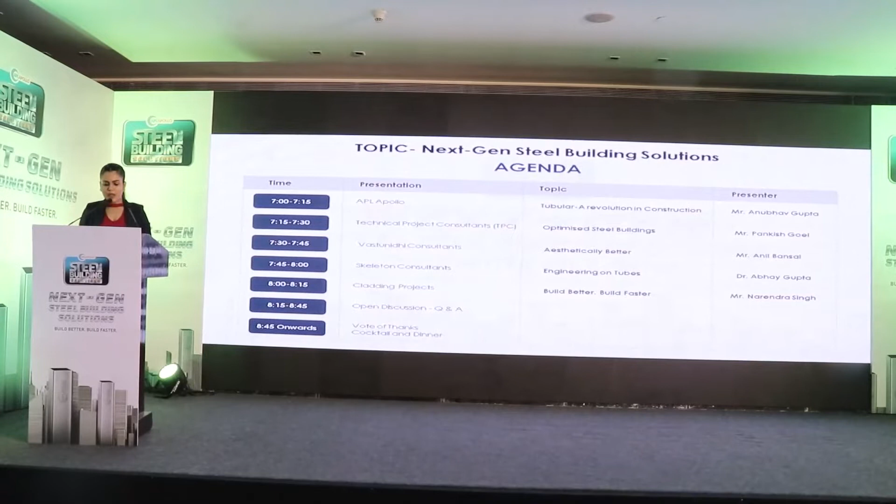So ladies and gentlemen, without any further ado, I would like to invite on stage the Group Chief Strategy Officer from APL Apollo, who focuses on strengthening the strategic capabilities while also identifying and evaluating innovative opportunities for APL Apollo in the longer run. He also advises on corporate development, communications and marketing of the APL Apollo brand, aimed at creating a strong positioning of the company within the domestic and global markets.

He has over 14 years of experience in industry research and business strategy. Please put your hands together and join me in welcoming Mr. Anubhav Gupta. Good evening, everyone.

It's a real pleasure to have you here. It's a lovely evening, and we thought to gather every one of you so that we can talk about a Nai Soch in the construction industry. We being the largest structural steel tube company in India, we are coming out with some building solutions which we think could revolutionize the industry in India. And with your graceful presence, with your support, we believe that we will make this happen.

So this presentation is about build faster, build better, with a lot of support from some of you sitting here that we could execute some of the projects in the last 3 to 4 months. And with that confidence, with that conviction, we thought it will be good to make everyone come here and talk about it in detail. So when we are talking about revolutionizing the construction industry, it is about looking at the problems the industry is facing today.

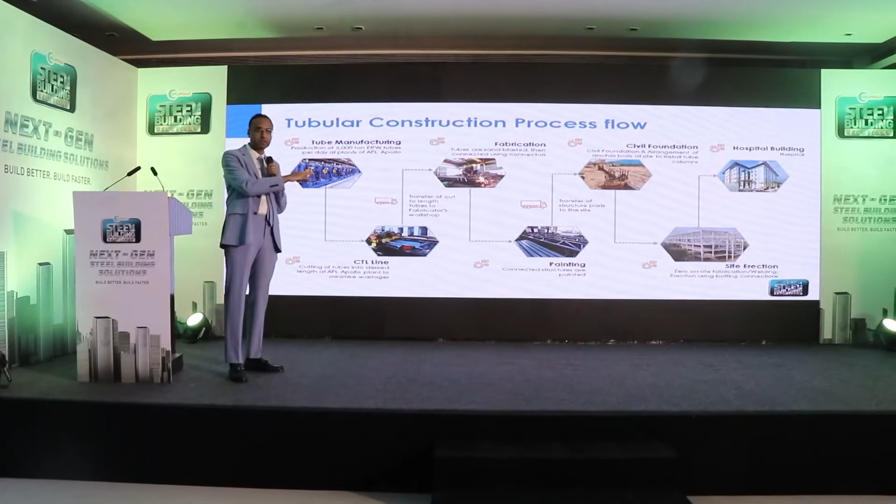So the number one thing which comes here is the speed. As you can see, there are parallel activities which take place simultaneously. Once the drawings are finalized, the manufacturing of all the steel sections, the cut length sizes which go to the fabrication yard. At the same time, the contractors are working on the civil foundation. They are making the foundation ready. The fabricators, after receiving the tubes, they are working on the fabrication, putting up the end plates and putting the material on site, and then the erection starts.

So that's how we are able to achieve speed here, and one of the very prestigious projects from the PWD in Delhi, which got executed very recently.

Right now, tubes in construction or steel structures are not used to the optimal level. The current consumption of tubes is not more than 10 to 15% in any structure. They are currently used for trusses, joists, columns, bracing, and facade structures. Why not make the structure more efficient and optimal?

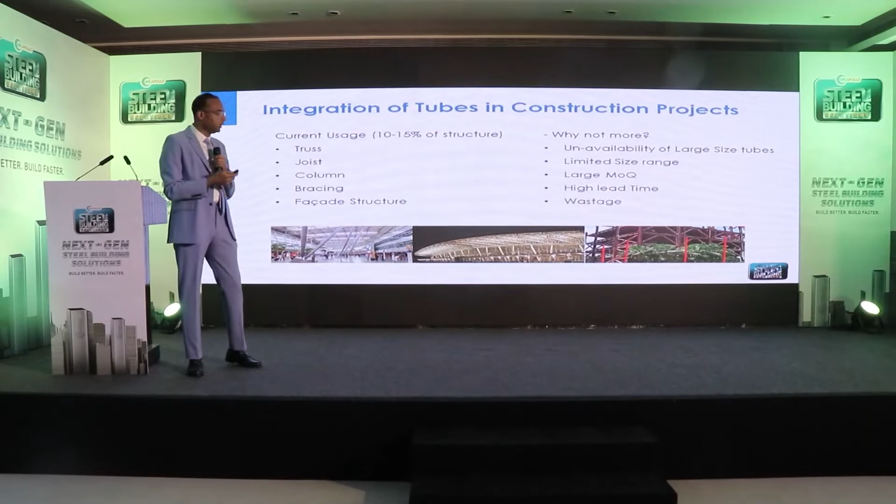The industry faces unavailability of high diameter tube sections from manufacturers, along with timely availability issues and a limited size range in manufacturers' catalogs. They ask for large MOQs, which is not feasible for many projects. Lead time is very high, up to 2 to 3 months, which discourages engineers and architects from choosing tube. Fabricators also complain about wastage when working with hollow steel sections.

We'll talk about how we are addressing all these concerns and myths about tubes. We're going to vanish them.

The applications of steel tube construction span real estate and infrastructure projects, whether high-rise buildings, institutional buildings, residential buildings, warehouses, cold storages, factory sheds, food parks, oxygen plants, aviation hangars, and the upcoming data centers.

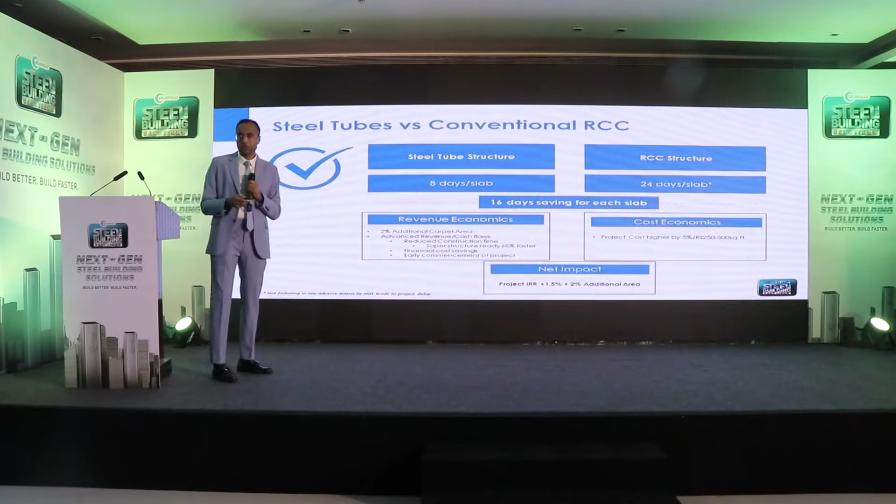Where steel tube wins over conventional RCC is speed, number one. Any slab we achieve in steel takes up to 7 to 10 days depending on floor plate size, whereas in RCC overall we have an average of 20 to 25 days.

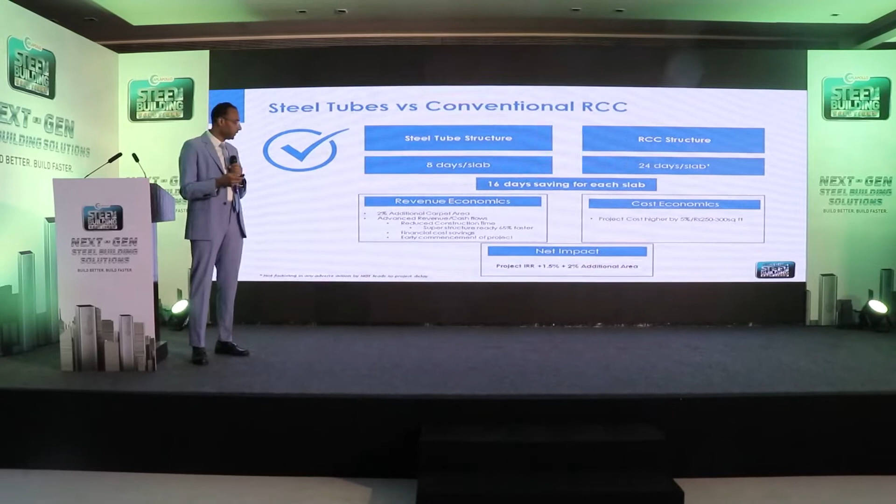This 16-day saving is quite significant for developers or building owners, as they can improve their IRR, the internal rate of return on their investment. They get extra carpet area, and for buildings like hotels or hospitals, they can advance the cash flow so they can start operating the building early.

Against that, they have to pay 250 rupees per square foot extra. But if they get 2% additional carpet area, that cost gets mitigated immediately.

The other reason steel tube construction is becoming prominent is environmental friendliness. We all reside in Delhi during winter, and we know that when smog comes, the government has to ban construction activity because conventional RCC acts as dust in the air. With steel, there is no dust.

At the same time, groundwater consumption is very high with RCC construction. In steel construction, we are able to save that as well.

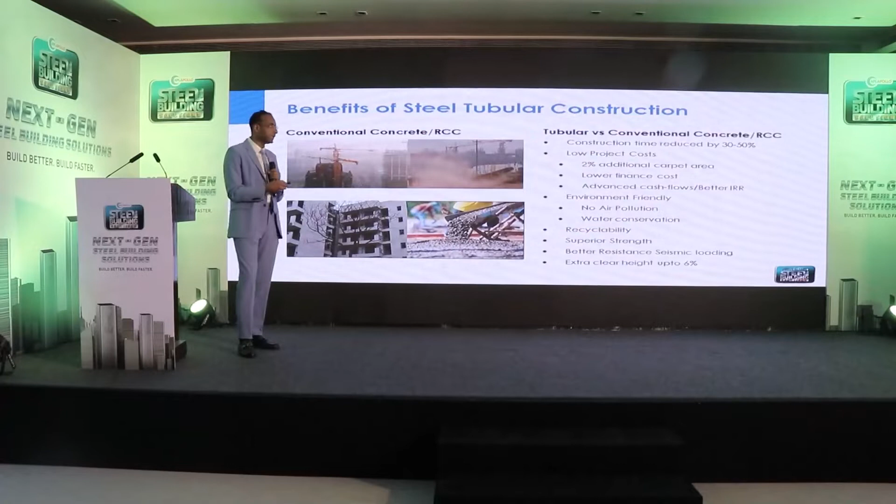Other benefits: construction time is reduced by 30 to 50%. By paying 250 rupees per square foot extra, the benefits from pre-advanced cash flows mean the actual returns will be much better going for steel. Steel buildings also have recyclability, superior strength, better resistance, and we can achieve extra clear height up to 6%. If it's a super high-rise tower, there could even be an addition of a floor.

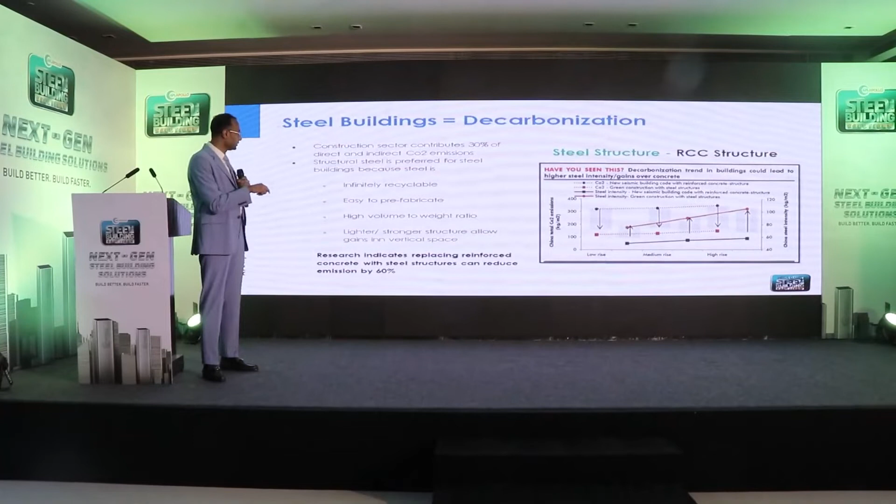This is a study we found from global experts about decarbonization. Right now, globally, 30% of CO2 emissions come from the construction industry, and structural steel is being preferred globally because it is infinitely recyclable, easy to prefabricate, and has a better volume-to-weight ratio. Research suggests that if we replace reinforced concrete with steel structures, emissions globally from the construction industry could be reduced by up to 60%.

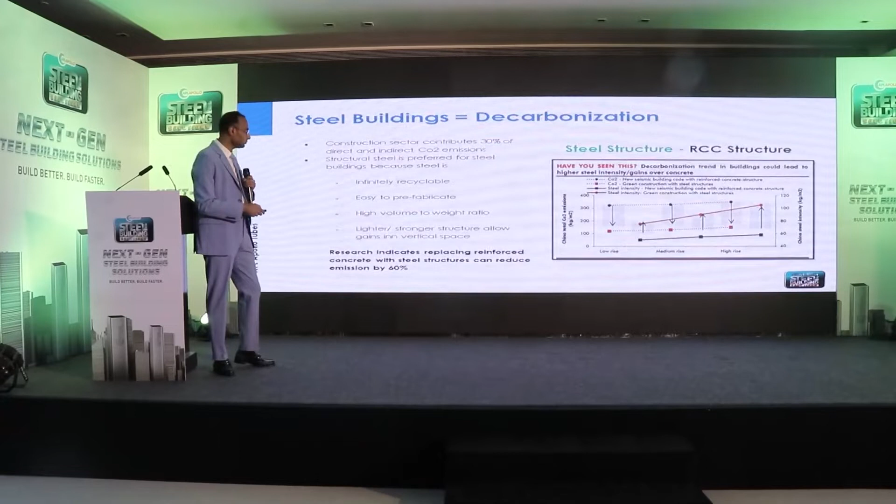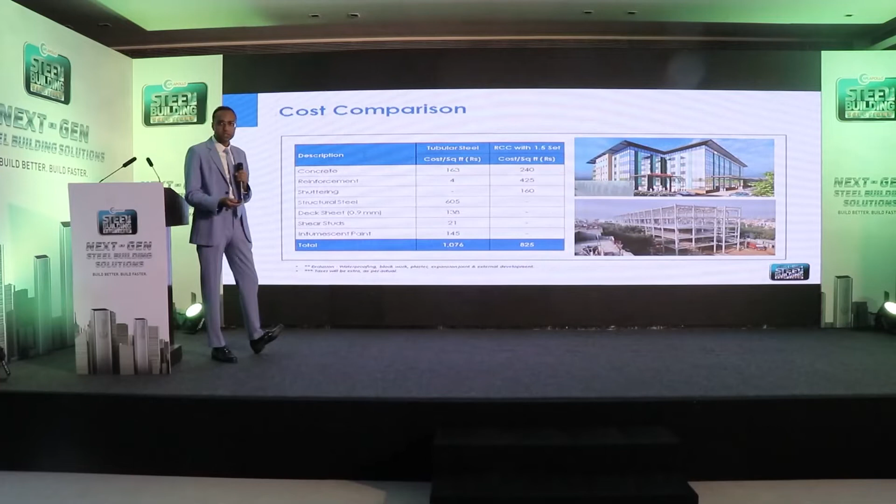This is a comparison we did between RCC and steel construction. We've excluded foundation cost here, focusing on the superstructure, with a concrete rupees-per-square-foot comparison. Today, RCC construction would be around 800 rupees per square foot, against which steel construction comes at 1076. That's the cost difference both technologies are offering.

We have also observed that tubular sections are more optimal than built-up sections, which have been used for ages. Even 100 years ago, the Empire State Building in New York City was built using built-up sections. Then hollow steel sections came into construction, but because of non-availability of large sizes, contractors again shifted to built-up sections. Yet compared to built-up sections, tubular buildings also offer a lot of benefits.

It's more fast even than the built-up section. The lead time of the section is low because the tubes are being manufactured on rolling mills which are running at 200 meter per hour speed. It is easy to weld because it's a single seam which comes online on machinery, whereas for built-up it's all manual welding what a fabricator has to do.

Then again, the built-up sections for high-rise buildings need to be shuttered and encapsulated, which may not be required in tubes. So you get additional 2% carpet area here as well, and aesthetically tubes are better. And all of the friends sitting here are using tubes for large span projects where the span is beyond 50-60 meters. So why not use tubes for the lower spans as well, as they offer a lot of benefits.

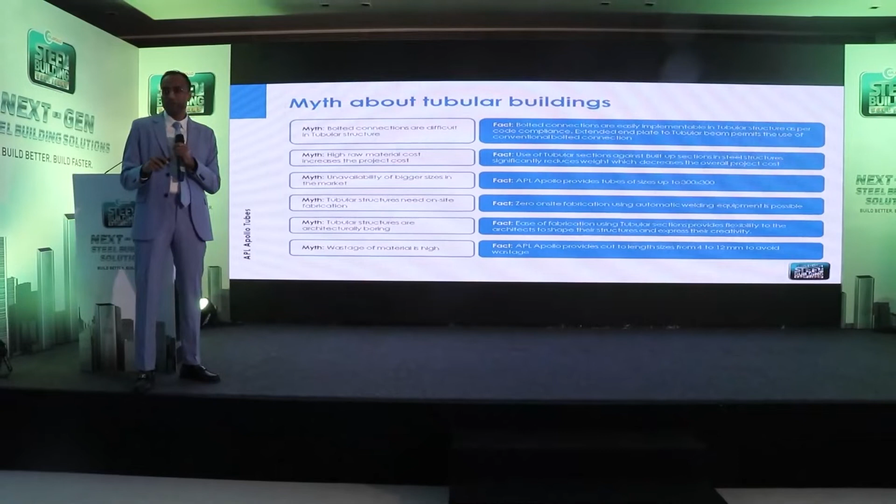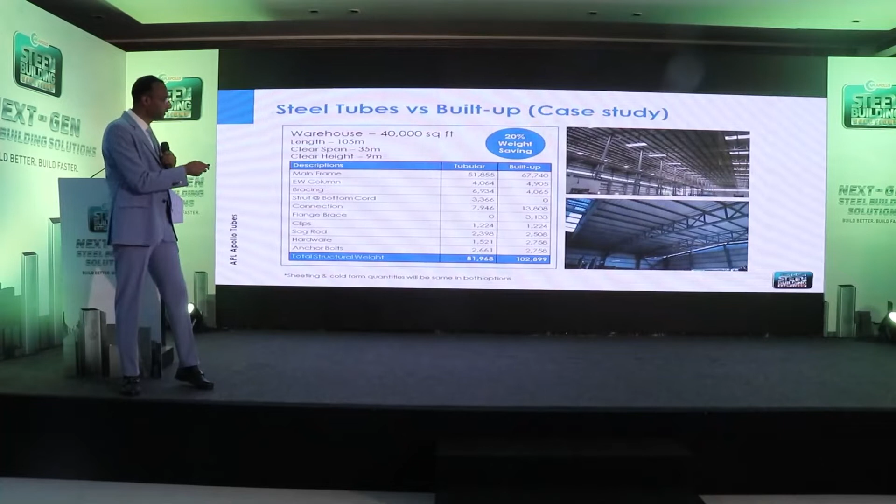These are some of the case studies we have done comparing built-up and tubular. It's for a 40,000 square foot warehouse shed with a clear height of 9 meters and span of 35 meters. What we achieved is 20% weight saving, and this has been vetted by IIT Roorkee at the same time.

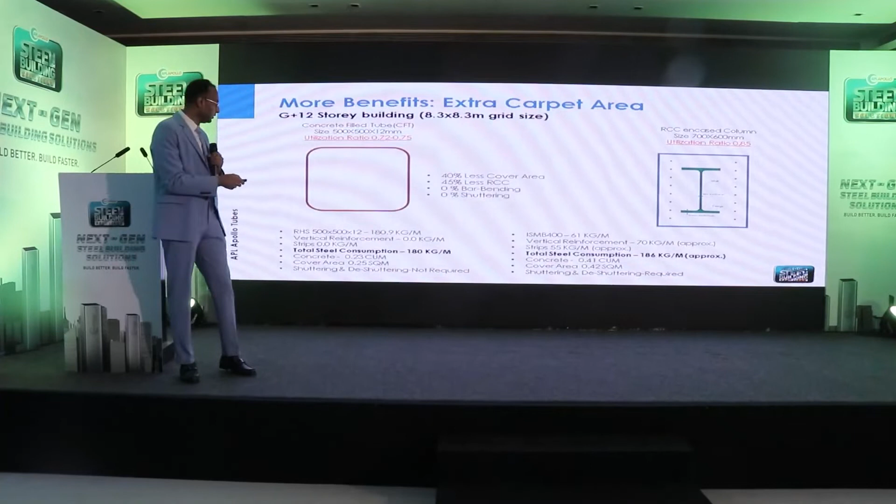This explains how we get extra carpet area using tubular versus built-up. We believe almost 2 to 3% of the carpet area could be increased using tubular sections. Now this is what we are really proud about - the ongoing hospital projects with Delhi PWD.

There are 7 hospitals at 7 different sites. Work has started for 5 of the sites already, and the projects are at various stages of completion. The structure is completed. We have a team from the structural consultants, the architectural consultants, and also the contractor who have done the project.

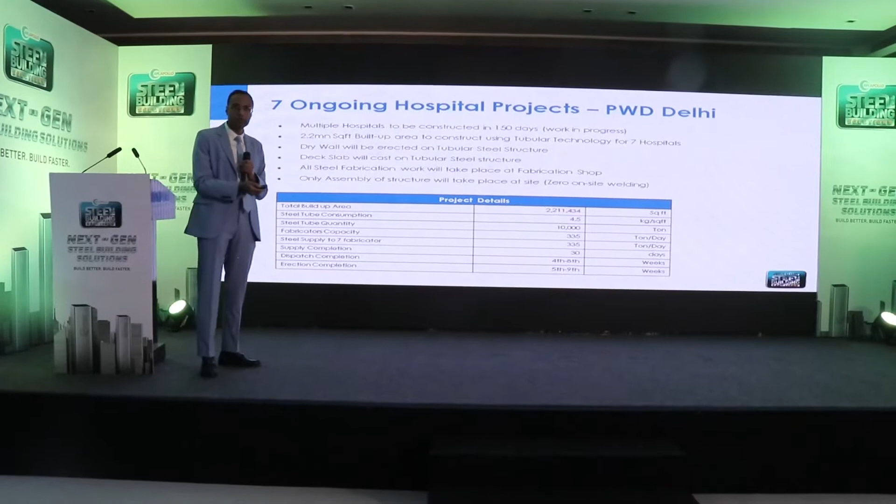One point I'd like to highlight is the 10,000 tons of steel which got manufactured, delivered, fabricated, and erected at these sites within an average time of 3 months. That's the average time for any of the projects. These are the sites for some of the projects. The average erection time is 1 to 2 months, before that all the preparations regarding foundation and material dispatch on site.

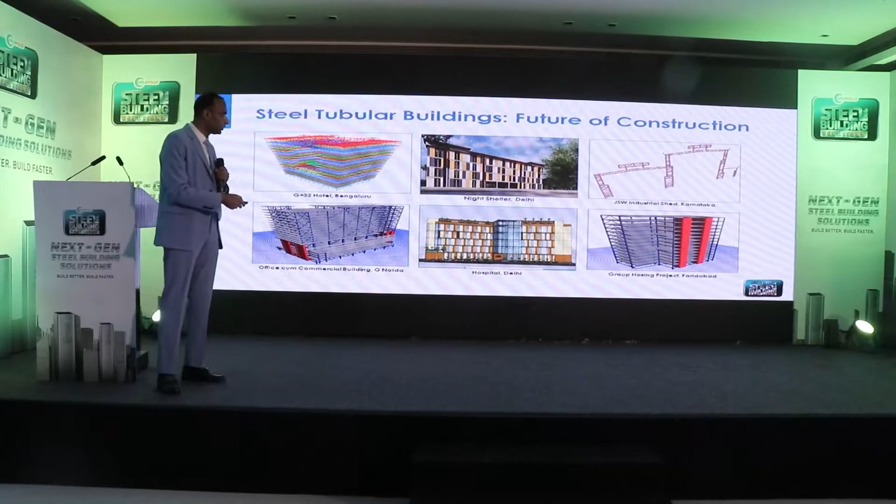These are some of the other projects which are in pipeline. A very exciting 32-story hotel tower, which is under design stage in Bangalore. Apart from that, other various buildings across India.

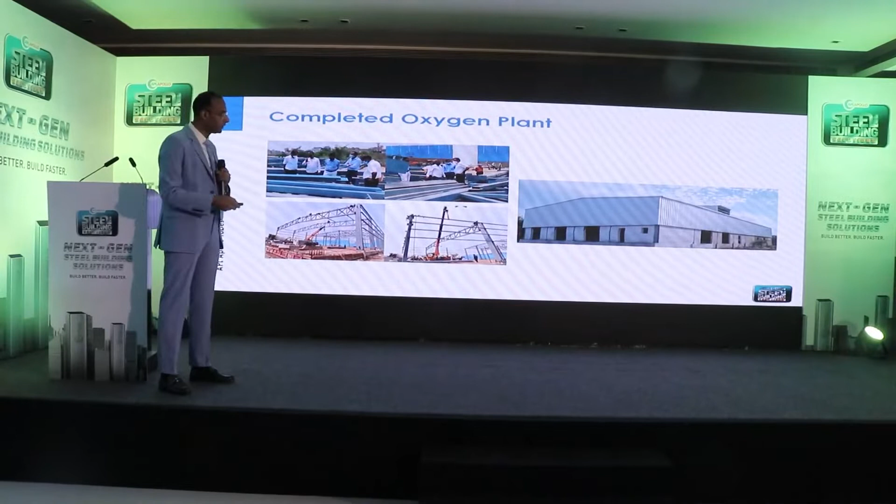This is the oxygen plant which got completed using tubes last year. The execution time for this project was 15 days, from the day of manufacturing of tubes to the dispatch of material and fabrication and erection. It's a small shed, 15,000 square foot, but 15 days was the total project lead time.

These are some of the projects where the tubes are used in industrial sheds. It's an 80,000 square foot shed with 15 ton crane capacity. The best part here is that the cranes are running on tubular sections.

This is one of the myths that tubes can't be used for crane, but it's a live project 40 kilometers from here. I would request you to go and have a look.

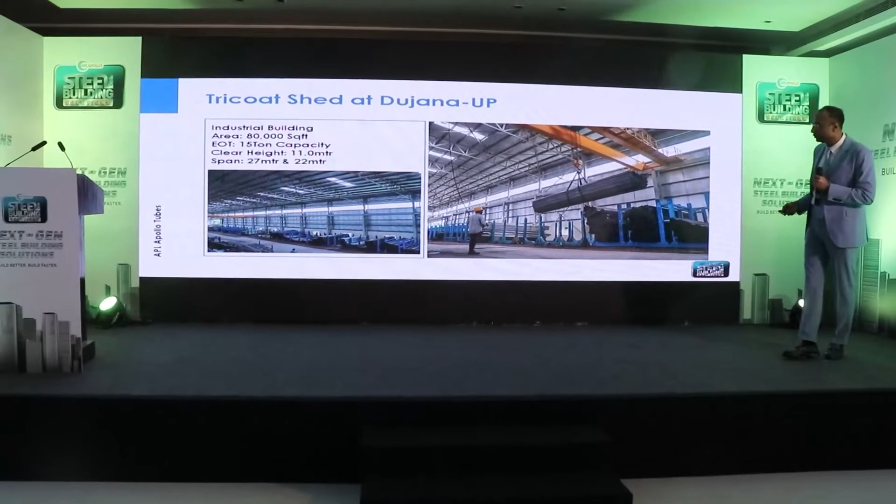So I guess a very important point we have been touching is the speed, which is 8 days per slab. So these are the activities what we have seen in the hospital projects. Day 1, site mobilization.

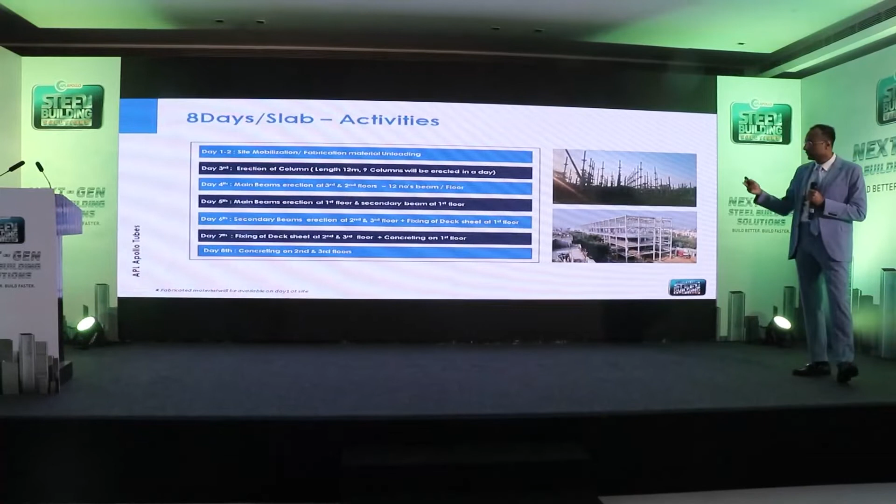Next day as well. Day 3, erection of columns. Then main beam erection on 2nd and 3rd floor. Day 5, main beam erection at 1st floor, and then secondary beams, and then fixing of deck sheet, and then the concreting. So that's how it goes.

Our sections anyway are like 12 meters in height, so it covers 3 floors. And if everything is done well, the speed could be 7 days as well.

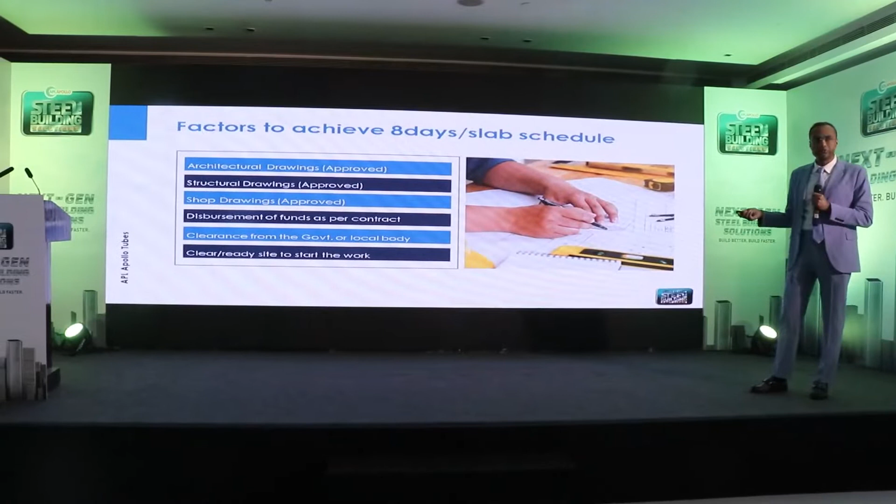Now this again becomes very important, what are the factors to achieve the speed. The contractor will require approved architectural drawings, structural drawings, shop drawings, disbursement of funds to the contractor, which becomes very important, and the clearance from any government body which is required, and a clear and ready site to start the work.

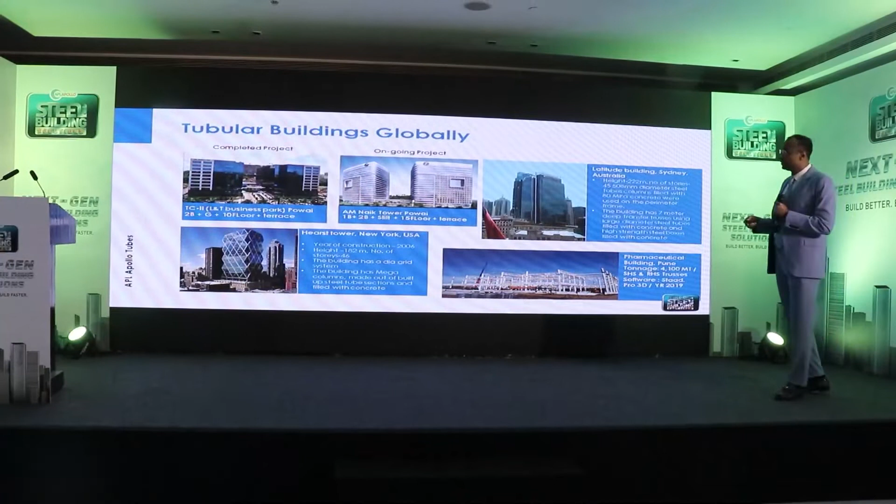These are some of the tubular buildings globally, and happy to share some are in India as well. L&T has done two projects in Bombay. Apart from that, we have buildings in Australia, New York City, Pune. It's an ongoing project.

In China, we have as much as 70-story towers. Then hospital building. L&T has done one more project, DRDO in Bangalore. There's a similar building in Jammu.

Dr. Anubhav Gupta is present here. I'm sure he will talk about it. And the city wall in London.

So tubes are anyway being used globally for super construction, but in India, you won't find many buildings. What is the reason? I mean, India is a very highly cost-sensitive market.

So our developers are not ready to spend that extra 250 rupees per square foot upfront, but then look at the benefits what we are getting against that. So we are sure that the acceptance will increase.

In India, project deadline hardly matters. So to achieve 8 days, 9 days of speed for one slab, is if anyone really takes that pain upfront.

RCC construction is unskilled labor work oriented. We have a lot of subcontractors who are willing to do work with unskilled labor. In steel, we need skilled workmanship.

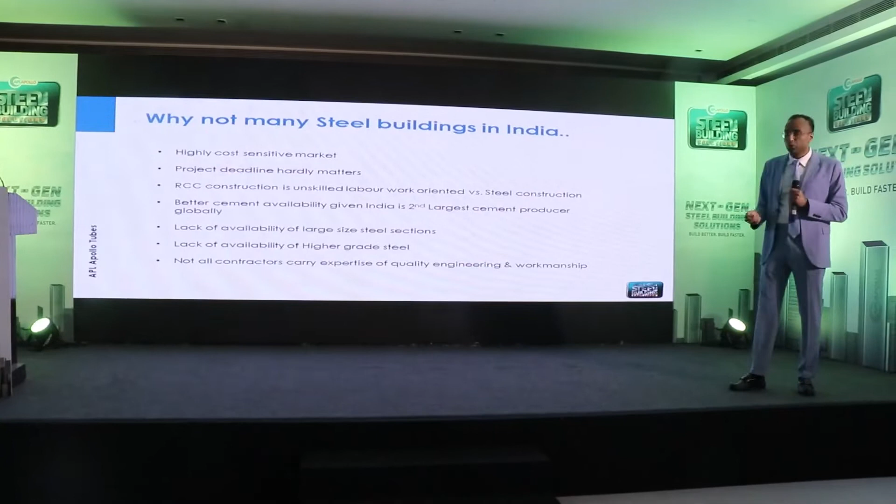Again, the point is that tubes are being used in India as well, not in high-rise, but for airports, for skywalks, for cricket stadiums, for the Kartarpur corridor, in refineries. So why not in high-rise as well?

After this, just a few pointers on our group.

With a lot of confidence and conviction, we suggest that if you look for tubular construction, we are here to back you with the sizes required, on-time delivery, and the technical expertise on connections and structural drawings. We have an in-house team of 10 designers, and we are also affiliated with top consultants in India who help us with designs.

Why are we doing this? We believe we are India's most innovative building material company. A lot of products we have introduced in India or globally for the first time. We were the first company to manufacture square and rectangular tubes way back in early 2000.

We were the first company to introduce pre-galvanized coated tubes, about 8 years ago. We are the first company to introduce direct forming technology from Italy to manufacture steel tubes. First company to introduce 300 square diameter tubes 4 years ago, and first to introduce 500 square and 1000 square diameter tubes.

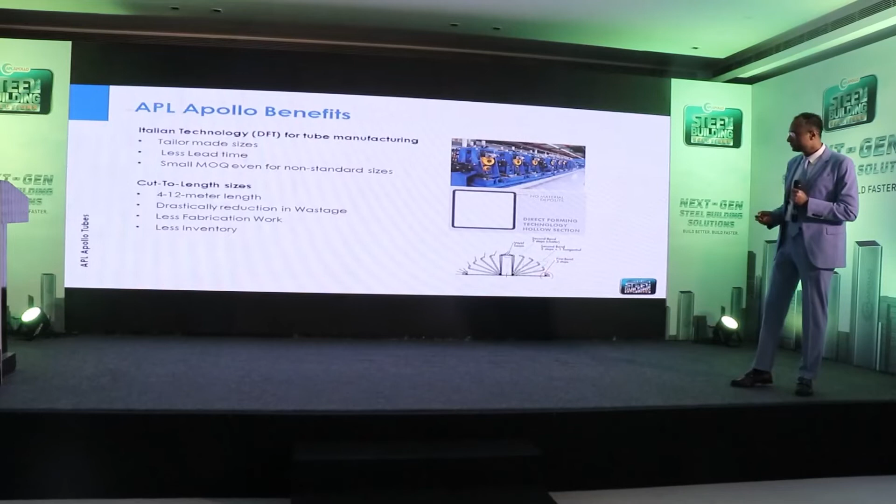Needless to say, the benefits and support we give to all contractors and fabricators include tailor-made sizes, the smallest MOQ—even 2 tons of tube—we are happy to supply. Lowest lead time possible. We have 11 plants across India and 800 distributors, some of whom are present here.

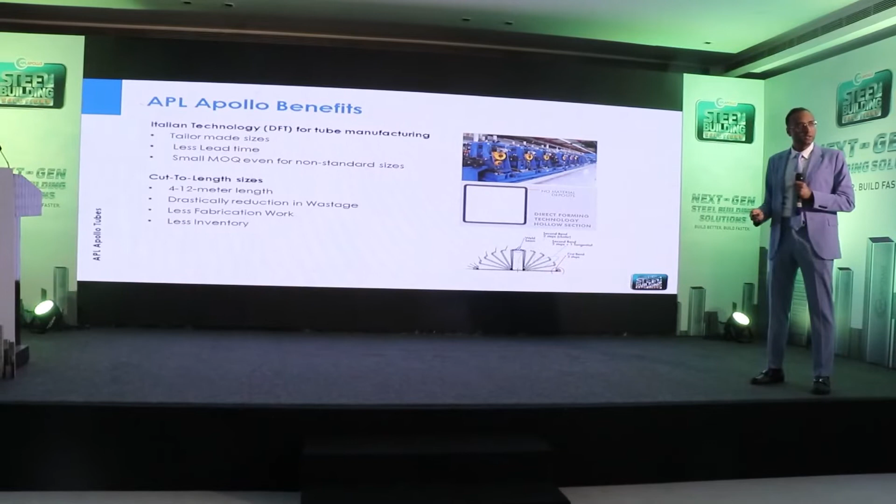Thanks to our distributors, we ensure the project doesn't get delayed. Cut to length sizes mean the fabricator doesn't need to have inventory, reducing his fabrication work. So this is what we believe, that we can try to bring some change in the construction industry. Thank you so much.

The next gentleman has a Masters in Civil Engineering from State University of New York, Buffalo. He is the Managing Director and Principal Designer of TPC, Technical Projects Consultants, with over 26 years of rich experience in structural analysis and design of various projects of any magnitude across India and internationally. He has led landmark projects in steel and RCC structures, including large-scale group housing, hospitals, shopping malls, IT buildings, star hotels, airports, sports stadiums, and data centers. Some prestigious projects designed by him include Grand Venice Mall Greater Noida, Ambience Mall Gurgaon, IIT Hyderabad, Medanta, Max and Fortis Hospitals, and AIIMS Hospital projects. TPC, Technical Project Consultants, possesses more than 4 decades of reputation for designing numerous landmark projects with state-of-art designs, uncompromising quality, and high ethical standards. TPC's knowledge of structural engineering, quantity surveying, cost control, and project management is imperative. In addition, TPC carries expertise in building health study, retrofitting, and seismic analysis.

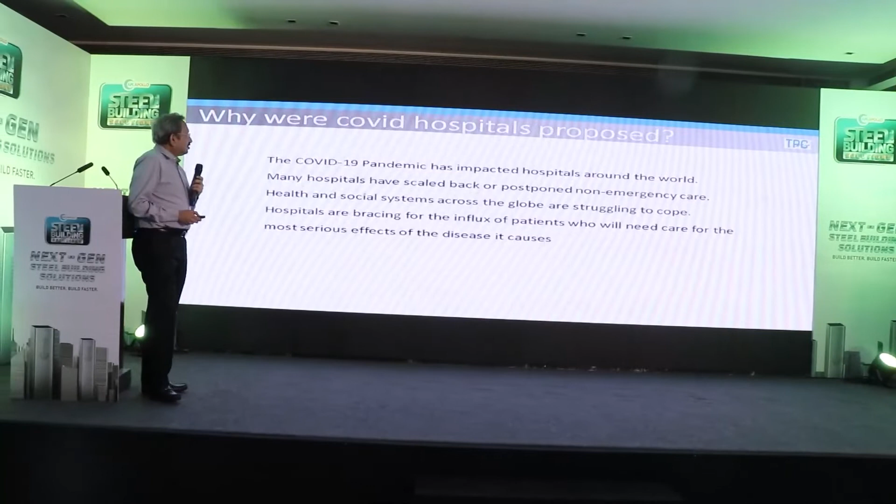Well, let's use concrete filled tubes, or just the columns, and then join them with joists. Then we got Apollo. They said, why are you only using it in columns? Why not use it in beams? So we said, okay, that was the next study that happened, and finally the proposal came up, and we started to design with the tubes.

The COVID pandemic had impacted hospitals all around the world. Many hospitals scaled back or postponed non-emergency care, and certainly India was very much impacted. The PWD Delhi wanted to build these hospitals very fast. And we all know what happened, we had a deficiency of beds.

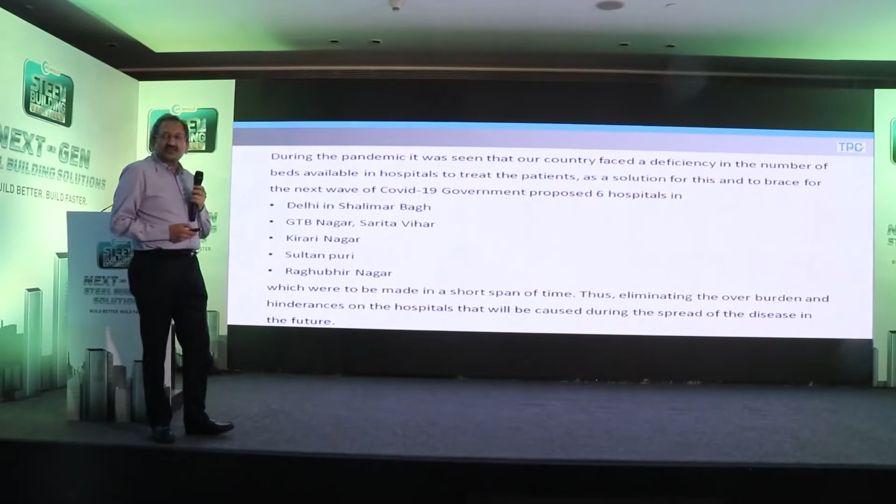So these hospitals came up, and we were involved in design of 6 of them. As Anubhav said, there are 7 of them, we are designing 6 of them. We designed the one in Shalimar Bagh, GTB Nagar, Sarita Vihar, Kirari, Sultanpuri, and Raghubhir Nagar.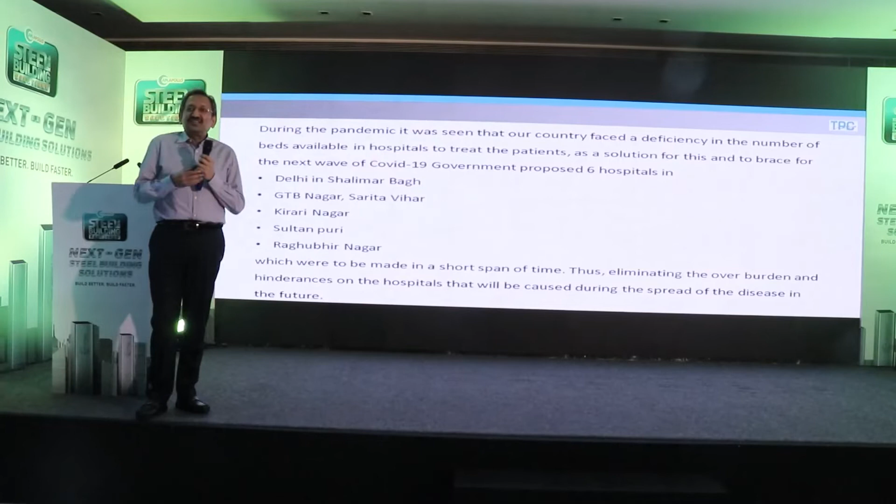So the process started, the tendering process started, I think, somewhere around July, ended in October to November. That was the first challenge, which I always feel - we are trying to build fast, but the initial process in our countries takes quite a bit of time. You're trying to build in 3 months, but the initial time in itself extends beyond the time that we are trying to build. As a structural engineer, it frustrates me.

Why can't we have shorter spans where we are able to at least get these projects up and running? So ARCOG were the architects, we were the structural engineers, and PWD was the client.

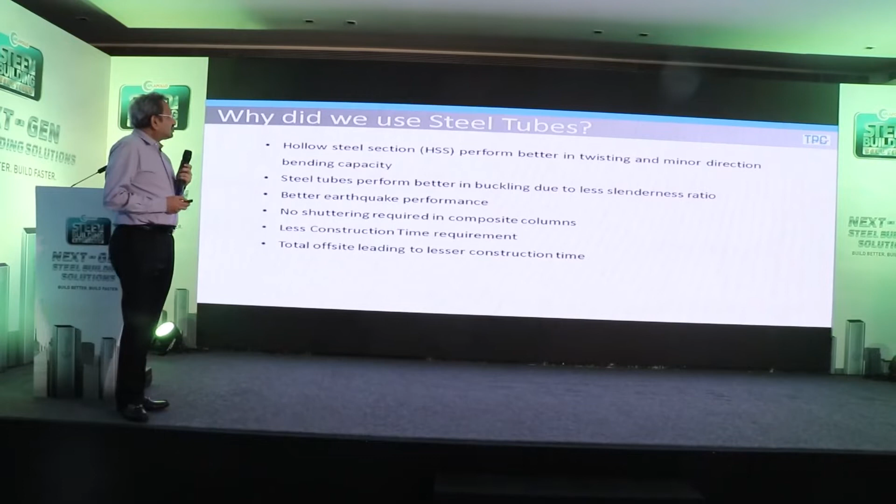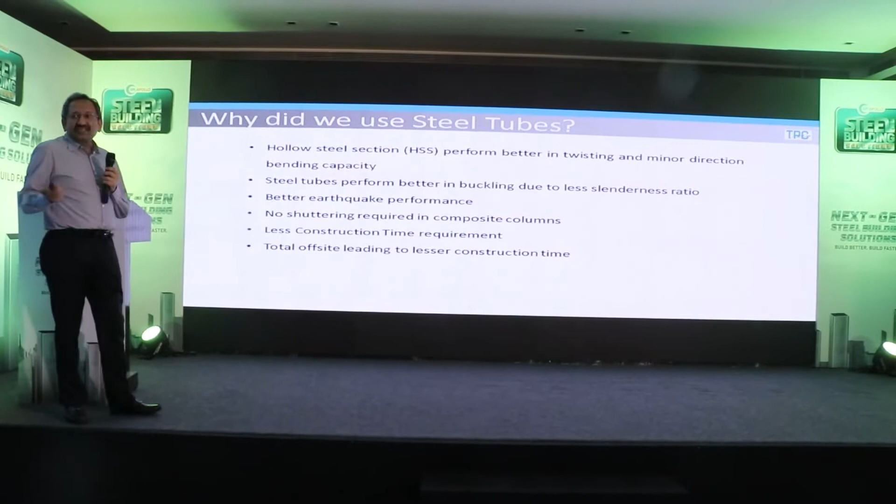One of the reasons we use steel tubes is that they perform better in twisting and their stiffness is much better in the minor direction, bending capacity is better. It performs better in buckling due to its less slenderness ratio, which certainly is a problem with I-sections. Steel per se has a better earthquake performance, very much important for hospitals.

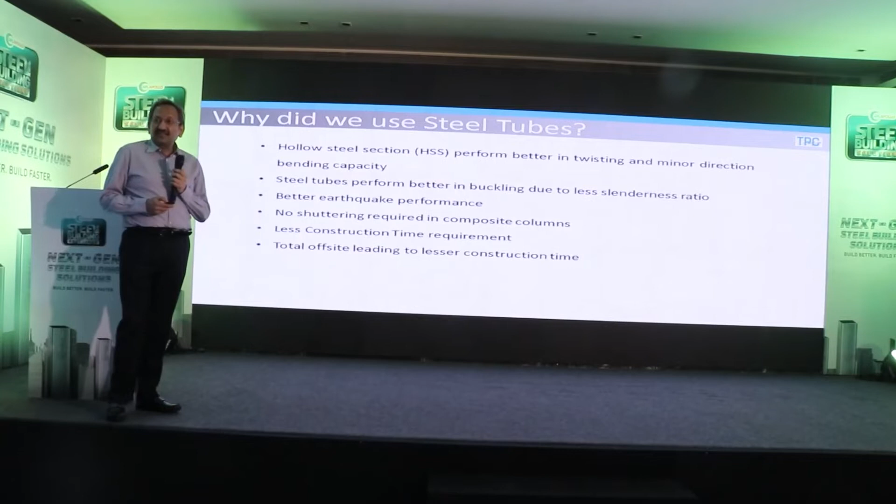No shuttering required in composite columns - I think this is a very important point, which certainly is a game changer for use of concrete tubes. Less construction time requirement, I think Anubhav has already talked about it. Total offsite work leading to lesser construction time. I think these last two points are most critical for these hospitals. The sites are very tight, especially if you go to these sites, there is very little space available.

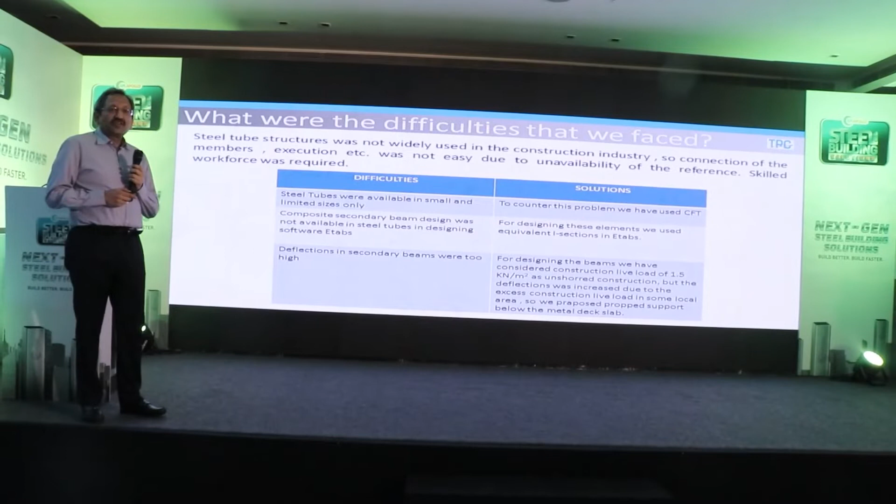As we started the design process, we also faced certain difficulties, and one of the most difficult things we had was the connections. My team worked day and night - Mr. Rajan, I hope he's there - they found out very innovative solutions to making these connections. We then discussed with Apollo that they can standardize these connections for the future, which I think they are in the process of doing.

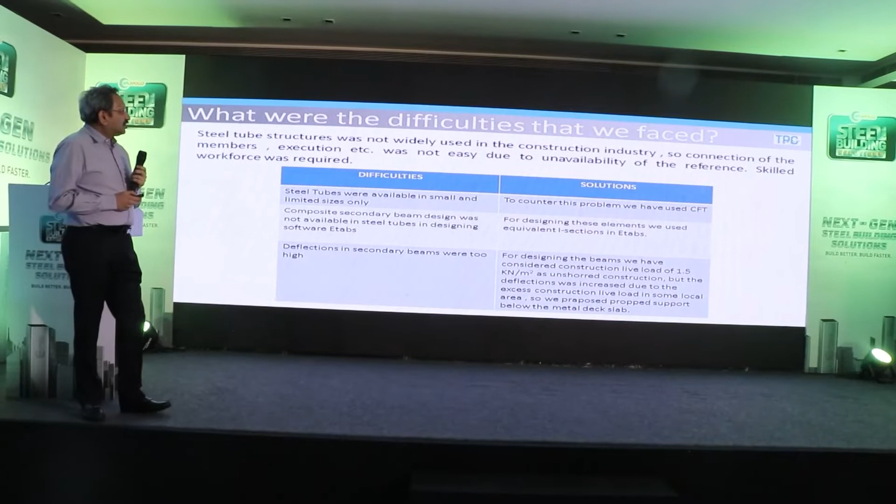The composite secondary beam design was not available for steel tubes in standard software, so for the composite action we had to develop our own software. We did that, and now we've been able to make it as a composite section. I think now they are also trying to get it incorporated in ETABS - is it already done, is it already a part of ETABS now? I think they have been able to get it incorporated.

The deflection in secondary beams was high. For designing the beams, we had already considered a live load of 1.5 kN per square meter as unshored construction. But the deflection increased due to excessive construction live load in some local areas, which always happens on our sites. So we had to propose prop support below the metal deck slab. This has been done by PWD, and now all issues are sorted.

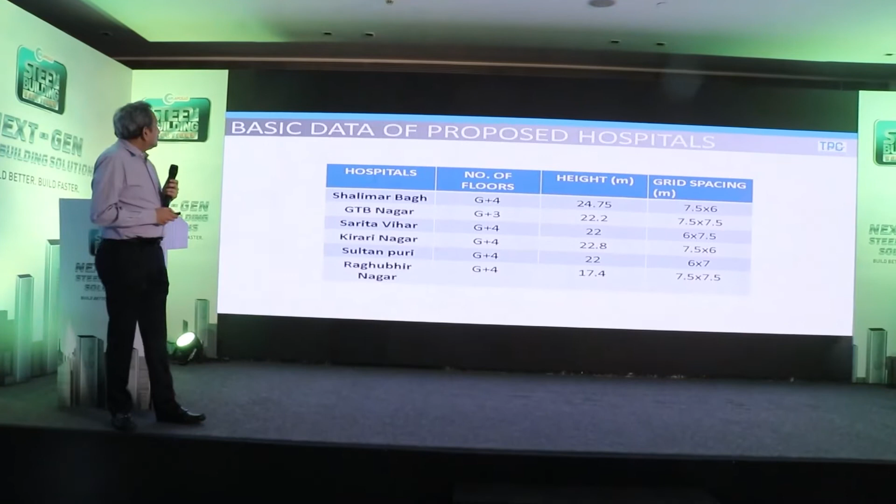So this was the basic spans that we had. The spans were quite standardized, which I think is very, very important for modular construction. Most of the spans were 7.5 meters by 6 meters. The buildings were quite repetitive, which really led to faster construction.

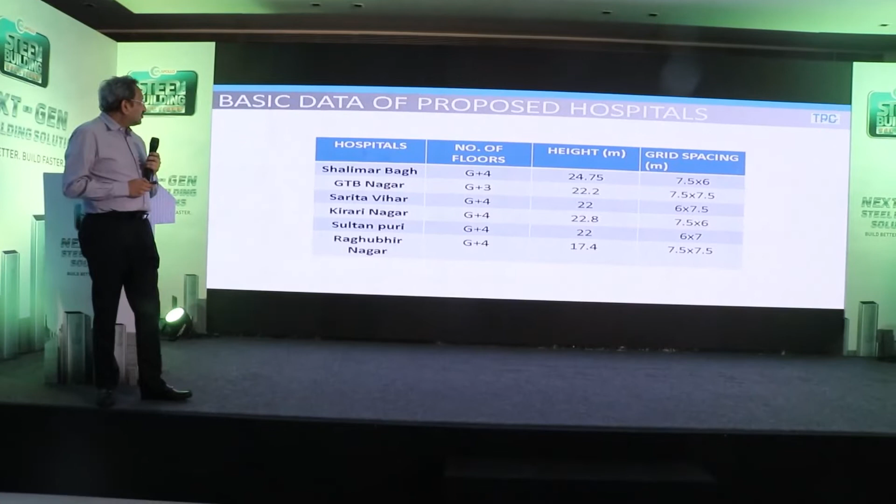The GTB Nagar had a height of 22.2 meters and a grid spacing of 7.5 by 7.5. Sarita Vihar is 6 into 7.5. Kirari is 7.5 by 6 again. Sultanpuri is 6 by 7. Raghubhir Nagar is 7.5 by 7.5.

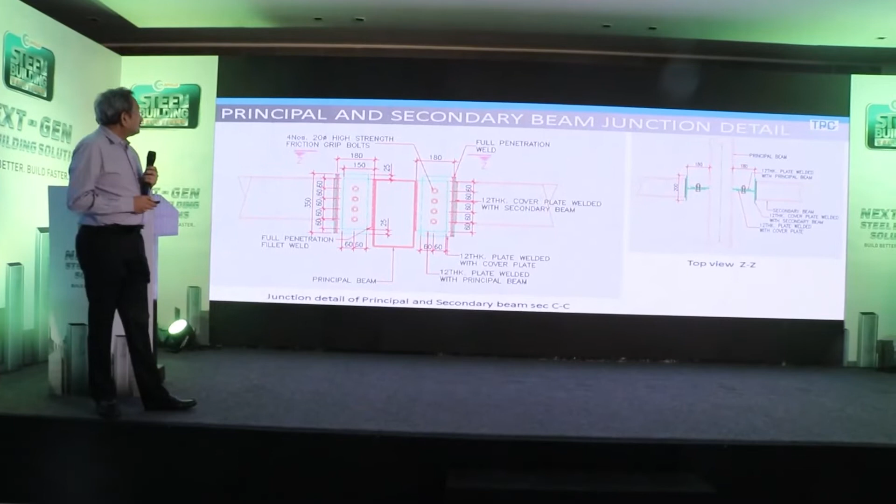This is the principal and secondary beam junction details. Beam and column junction details at the column. Primary to primary beam connection details.

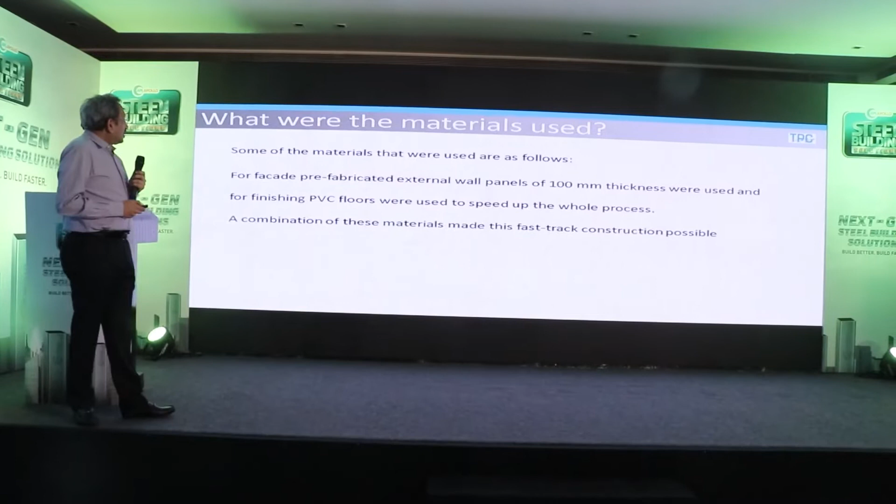So I would say that the second most important thing that I feel when we are designing any steel building is that we should not just look at it as a steel building. It has to be looked at in entirety. If we go with steel building and end up using block masonry, I think we have defeated the purpose. So it is a concept in itself. It is not just using tubes or using I sections. It is about doing faster construction in all end-to-end solutions.

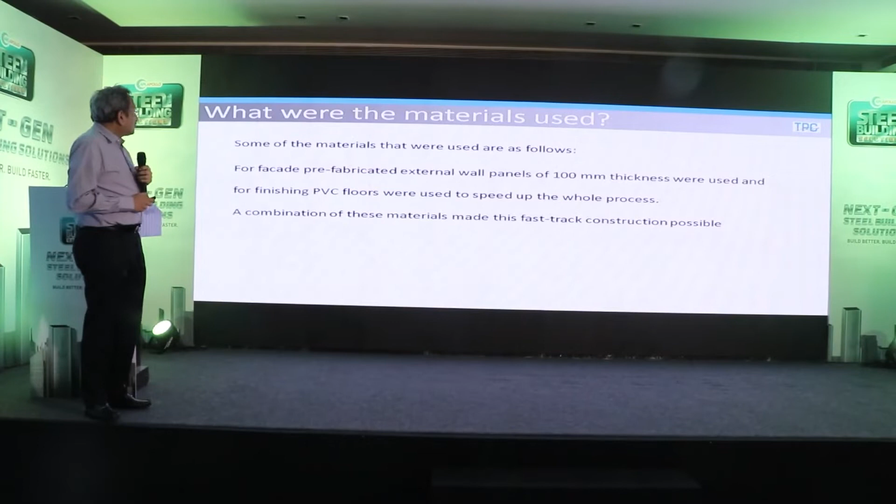So I would really congratulate the architects here. They looked at it in a very holistic fashion. They have gone for facades which are prefabricated. I'll show you some pictures also. External wall panels of 100mm thick have been used. For finishing, PVC floors have been used so that the whole process gets very speeded up. And a combination of these materials have made this fast-track construction possible.

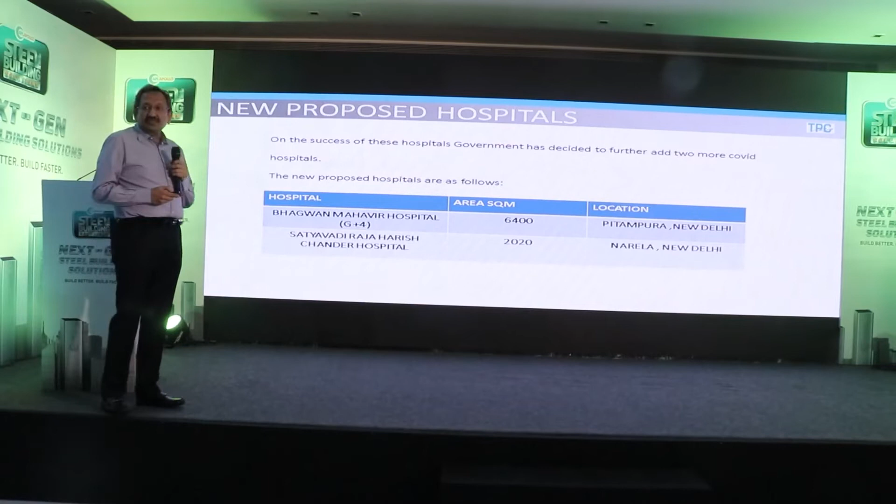And now looking at the success of these hospitals, the good thing is that PWD has decided to add a few more hospitals with the same technology. So I think that's a feat for the technology for sure.

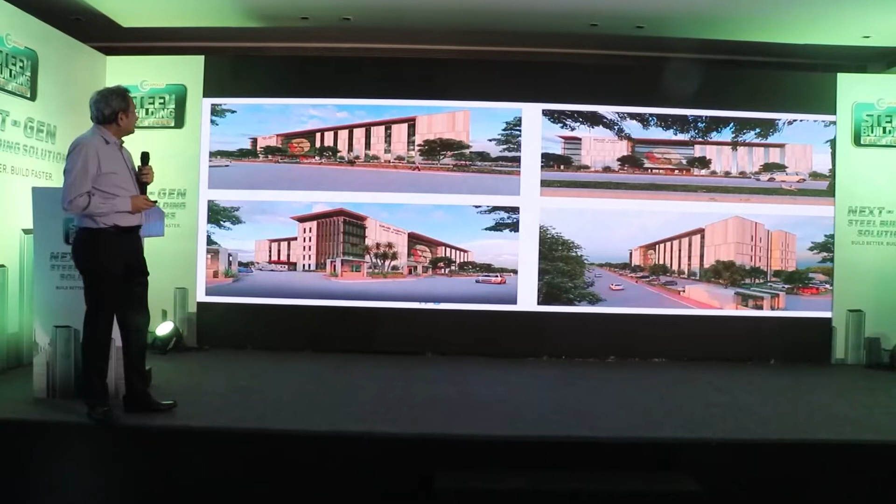So these are some of the desired elevations as per the architect. And these are the site pictures. So you can see it's a kind of plug and play, putting the facade immediately as soon as the structure is getting completed. No wet work is there. Everything is about prefabricated panels, glass, and that's why we have been able to achieve very fast construction.

I think the construction started in December, end of December, start of January, and most of the projects are in the finishing stage. But I would like to add, they could have been finished quicker, but we were working with a government department that has its bureaucratic process, and that's why at some stages it got slowed down.

And the second thing I would also like to highlight, and I think it is for all of us to discuss, is this process of fabrication drawings. In any steel building, that is taking so much time that it actually ends up slowing down the construction. I would say it was not the tube manufacturer which slowed it, it was not the contractors who slowed it. It was just the process of having one more vendor making all the fabrication drawings, then it coming to us, we finding some errors in it, again going back, the whole thing. So that I think is one of the challenges in every steel building, whether made with tubes or anything, which we need to find a solution to.

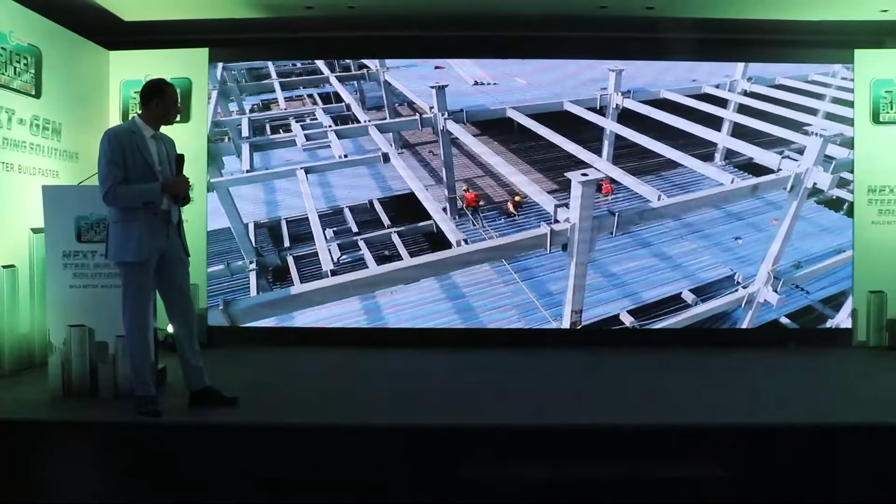We've been building since the dawn of humanity. For thousands of years, we've evolved to build bigger. Now comes the next revolution in construction technology. APL Apollo Steel Building Solutions for better and faster construction. Recently used to build a hospital structure in just 150 days. PWD planned 5 hospitals last year. Structural work at all the sites is almost done. The 1900 plus bedded GTB hospital had the largest built up area of more than 6 lakh square feet. Conventional construction technology would have been too time consuming. The pre-engineered steel tubes were selected to complete this challenging project in less time. 80 to 90% of the structure was built on 4 section sizes.

Drywall and deck slabs were erected and cast on tubular steel structures. All steel fabrication work took place at fabricator workshops with zero on-site welding, only structure assembly with high-strength bolts.

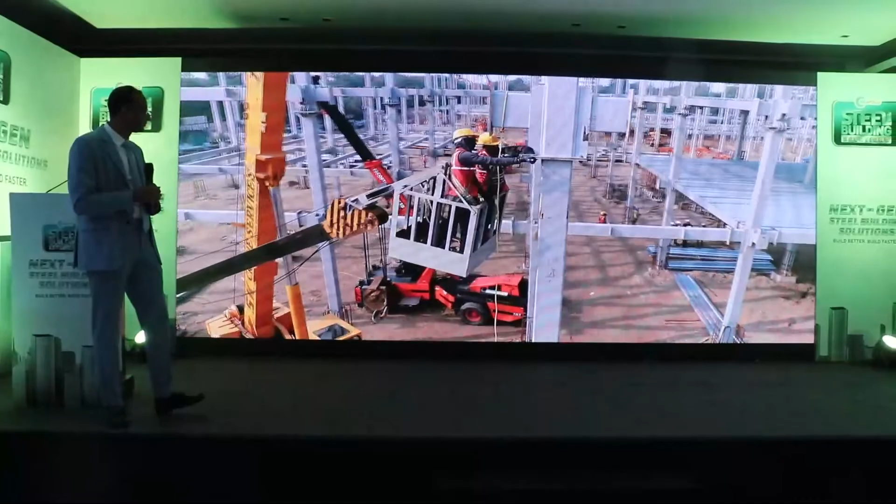This was made possible only with APL Apollo Steel Building Solutions. Thanks to tubular construction that offered the perfect balance of speed, quality, cost, and environmental friendliness, APL Apollo Steel Building Solutions give you lower project times, easier execution, and structure optimization. APL Apollo Steel Building Solutions, a true revolution for future construction.

Mudit Ji is here. Hi Mudit Ji. So, so next guest, Dr. Anubhav Gupta and Priyanka. Can we have some words about Dr. Anubhav Gupta, please? Before I call Dr. Gupta here, I love the way Mr. Goel mentioned RCC se to nahi hoga. But hoga. Kaise hoga? That's the steel building solution for you. I'm sure that this is going to bring a revolution in the construction industry.

With this, ladies and gentlemen, let us all take this forward. And next speaker we have here with us is Dr. Anubhav Gupta, a dynamic, multidimensional civil and structural engineer with vast experience in the areas of RCC and steel designing, construction management, teaching and research, and team building, imparting leadership to a group of people in pursuit of achieving individual and organizational goals. Currently having experience of design, coordination, review, mentoring and execution, etc. for more than 500 projects of RCC, steel and building, industry and infrastructure sector. Talking about his company, Skeleton Consultants Private Limited, a trusted name in the field of industrial, commercial, institutional, residential and special monumental projects. Skeleton Consultants Private Limited is an organization founded on firm soil of morale, ethics and integrity, seeds of which were laid by R.K. Gupta and Associates in 1989. The trio of E.R. Arun Sudhani, Dr. Anubhav Gupta and E.R. Jayesh Jain possess more than 100 years of cumulative experience in the field of industrial, civil and structural engineering consultancy. Ladies and gentlemen, please put your hands together and join me in welcoming Dr. Anubhav Gupta.

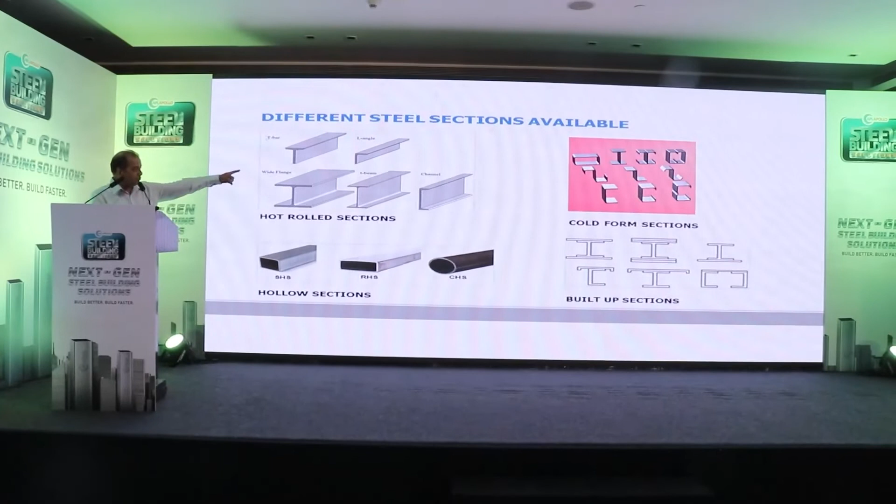The sections on the other side, cold form sections, we have been ignoring and neglecting for a long time. We have not been able to use them properly. Some of these tubes qualify for that particular kind of treatment also. So maybe a revision in the draft IS 801 and 806 would lead to good use of those things. In residential buildings, small residential buildings, we just can't use all those heavy sections - it doesn't make economic sense. So those will be there.

Otherwise, we have been using the development from sloping flanges to parallel flanges. And these are the new good things.

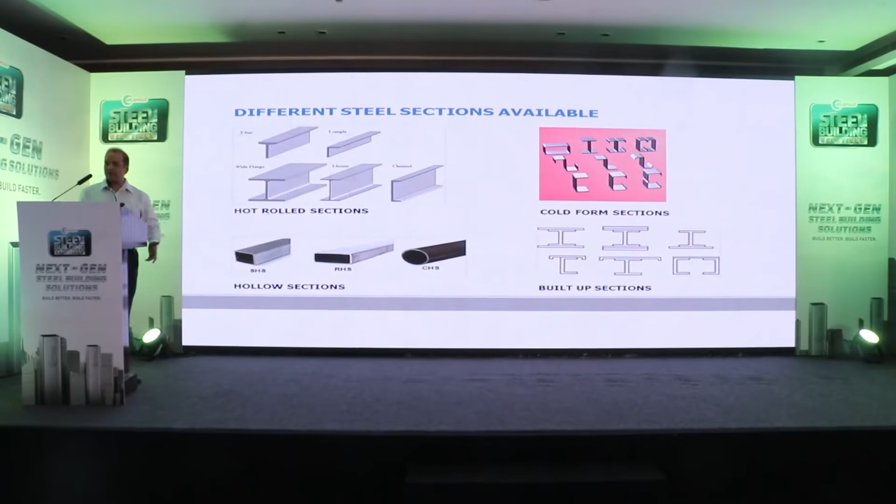What are the good points? Efficient, no doubt. Superior resistance, as already explained. Aesthetically pleasing - they look good, I'll show you one photograph. Higher strength to weight ratio. Less surface area compared to equivalent conventional sections results in savings in paint and finish cost.

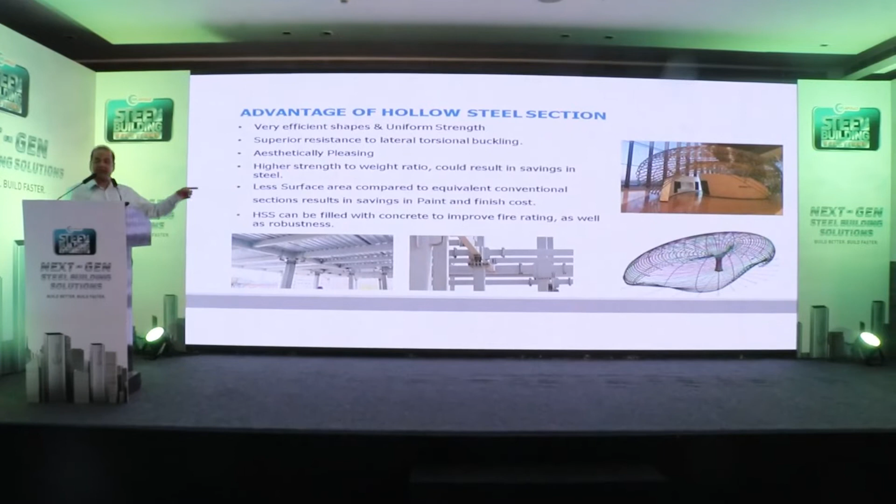This is one of the important things - the surface area per square meter of a closed section is much less compared to an open section. And that has the advantage in two things: one is painting, second is fire resistance. So this is very good about closed sections.

That structure - it's not a structural building, but it's a structure - and tubes are very efficiently used in those kinds of things also.

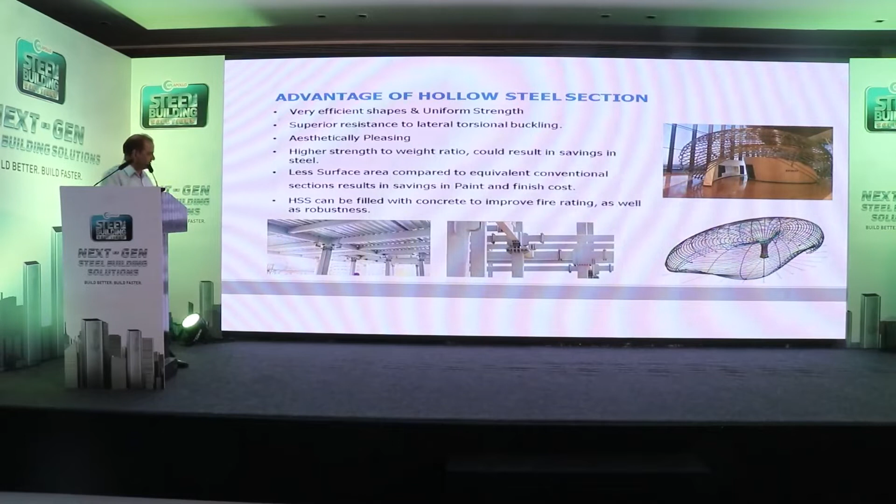Some of the pictures here I borrowed from your projects only, Pankaj. Due acknowledgements to you. So these are some of the areas where you can use it - means almost everywhere where steel can be thought of, you can use a closed section with a little pre-engineering, better pre-planning and good production. Certainly the fabrication drawings are a main point, but with good people around us, I'm sure some of the audience must be knowledgeable on Tekla software and those kinds of things. So they are our strength for all these things.

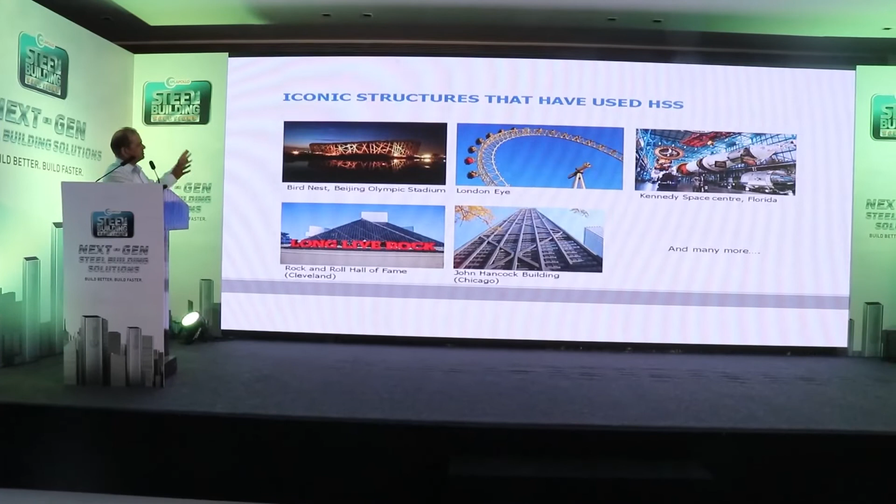Some of these structures globally where tubes have been used - we know some of them, but some of these things we can't imagine, yet they are made of tubes.

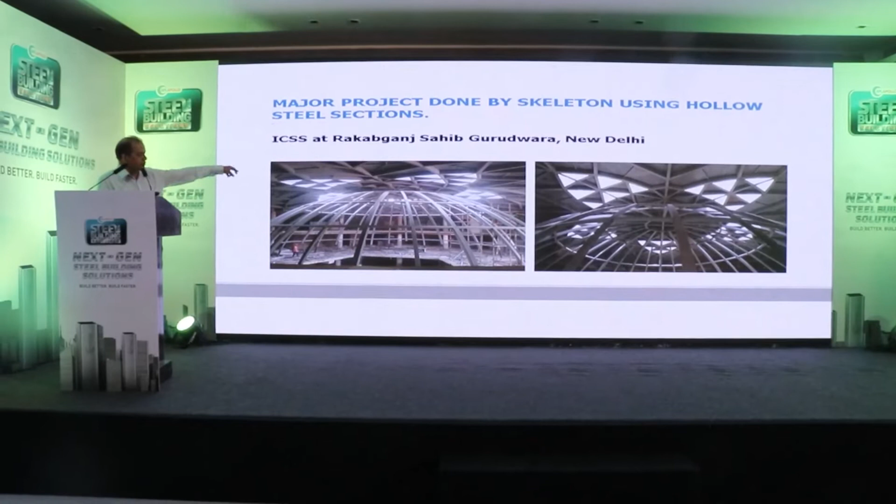Our projects - this is a project in Delhi itself, made out of tubes only. This recently won an award at national level by the Association of Consulting Civil Engineers. It's a domical auditorium created inside Rakabganj Sahib Gurdwara, inside an existing building. The roof is also made out of hollow tubes, a complete dome.

There was an RCC slab, 75 feet diameter, which we cut. The Gurdwara slab was not easy to cut - 9 inches thick. So we cut the entire slab through cutters, in 1 meter by 1 meter pieces, and took them out. Then, because there were 4 RCC columns to be removed, only then could we have accommodated this auditorium.

So we removed those 4 columns, removed the entire slab, and then covered it again with a steel domical roof, creating this auditorium inside. It is the International Center for Sikh Studies, a 200-seater planetarium sitting auditorium with overhead projection. This has been awarded as one of the innovative uses of steel tubes, hollow sections in steel.

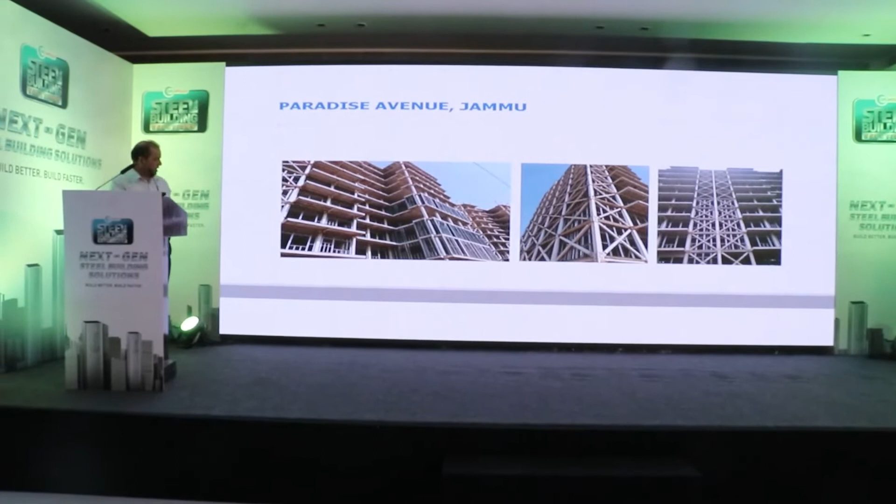I'm proudly saying this is one of India's largest residential developments, and maybe the first one in India - ground plus 13 in Jammu, seismic zone 5, on steel. It's completely prefabricated - there is no concrete, no brick walls above the ground. Out of 4 towers, 1 tower has been completed and people are occupying it. The other 3 are in progress - they were halted because of some issues, now restarting.

And the manufacturer, the fabricator of one of these, is just sitting here with us - Med Techno Facade, they are here only.

Schools we have done around school buildings. Similar to hospitals, school projects also need faster construction, so we did schools also with hollow sections.

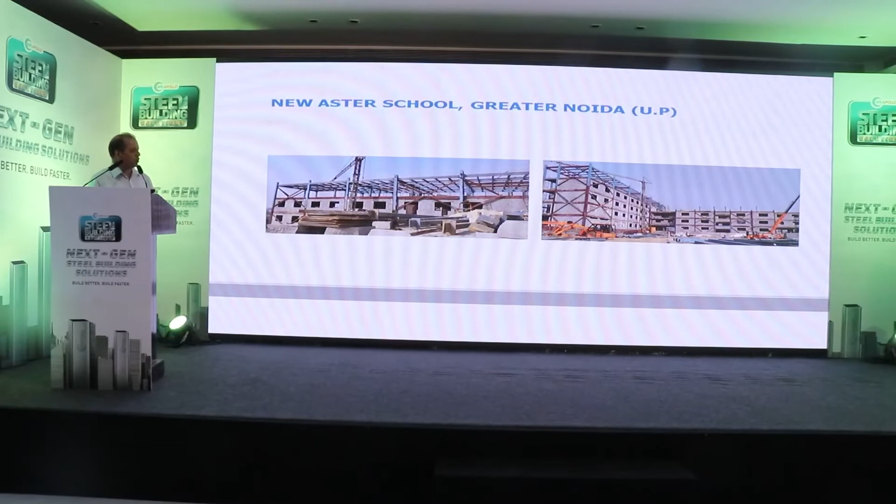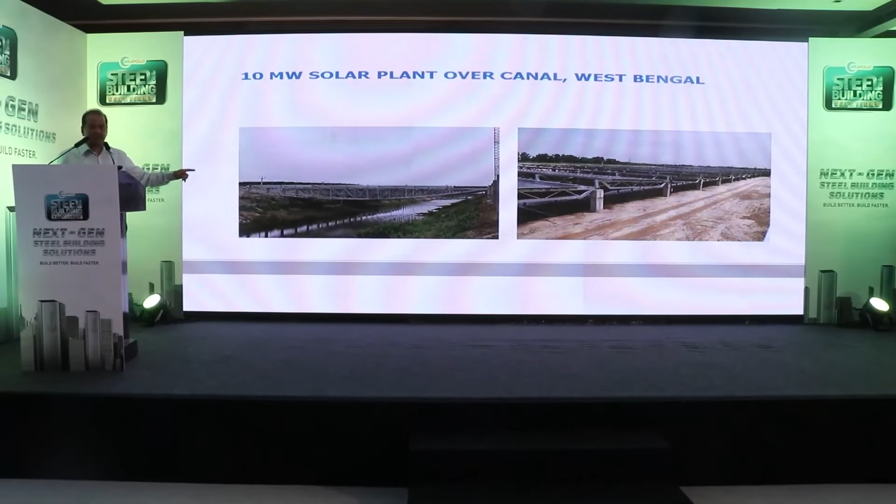This is an infrastructure project - canal top solar power project over Tista Fall Canal near Jalpaiguri in West Bengal. This is a 55-meter clear span truss, all in hollow tubes. Fabrication and erection were only allowed from one side, and no props or support could be taken from the canal bottom - that was the restriction. So the entire 55 meters was fabricated on one side, across a 4-kilometer long stretch. That was also done in hollow sections, and it came up beautifully.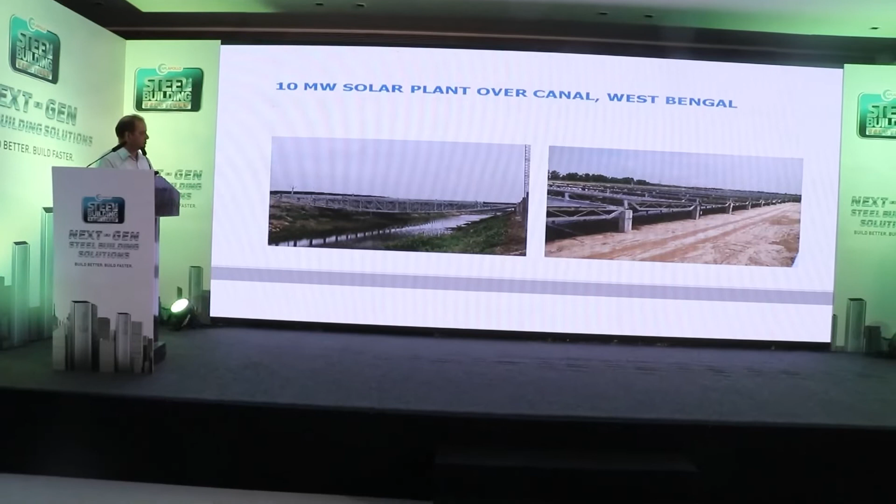This is a project which is in progress, something very different we are working on, and we got one good experience or learning from this.

India's tallest bungee jumping tower we are doing, at Rishikesh. Currently we have an 83-meter bungee jumping tower in India, again at Rishikesh. This one is coming up with an 89-meter bungee jump. On the top of a hillock we are creating this tower.

For any open frame section, undoubtedly circular hollow sections are better than square or rectangular. We did this exercise with both. First we designed it with square and rectangular sections, then we used circular hollow sections, and the weight reduction was 2/3 right from there.

This has been designed with a 75-meter tower height, and a 25-meter cantilever boom from where the person will take the bungee jump. The fabricator of this is also in the hall.

Rohit, hai aap yahan pe? So they are going to make this, and the tube is being supplied by Apollo. Amit hai? Mohit hai na? Yeah, so they are the partner.

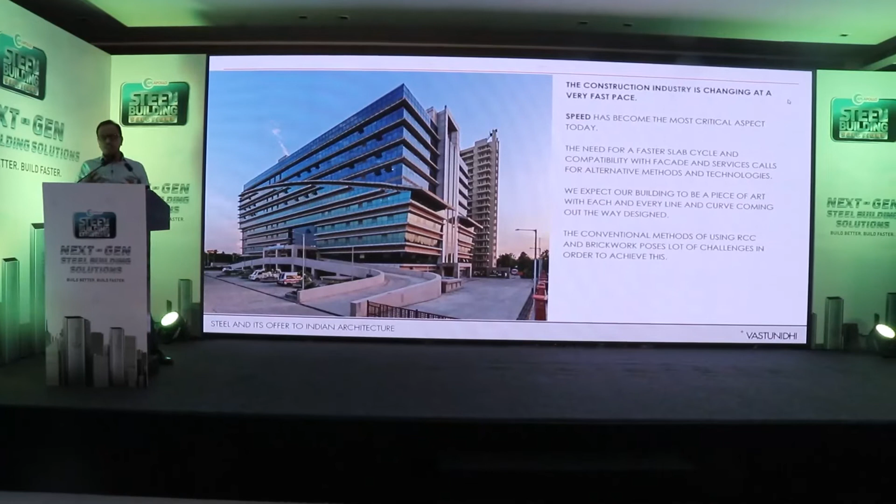We look at what is required where - where steel tube is required, where I-sections are required. Most of the structural engineer friends are here. It's not only what the tube can do, but what fits where, how it becomes economical, and how it can fit in the project. We are doing a few projects with Apollo also, looking at what is required where, and we do a camouflage to make a composite structure. So only conventional RCC method - I think we have to rethink a composite composition of the right materials and bring in the right product.

Real estate and healthcare need faster working with appropriate speed. These points have been taken by previous speakers too - how faster construction and some area in the footprint can be saved by steel tube with composite smart technology.

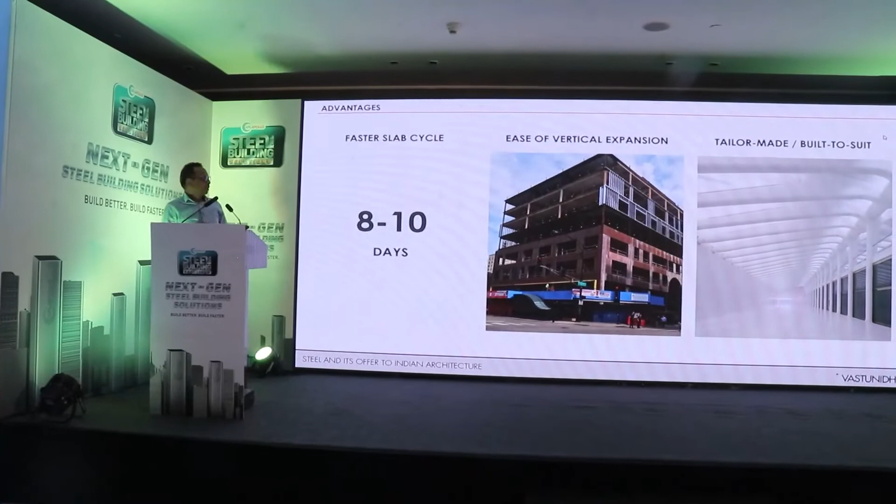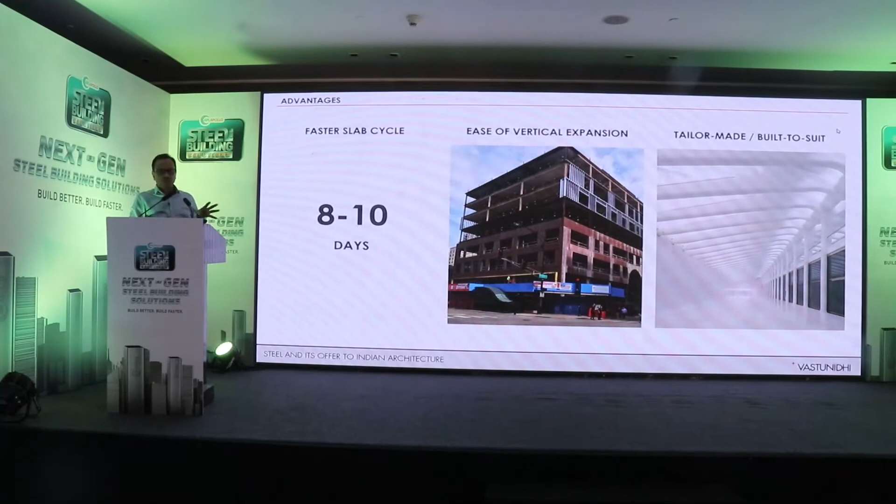I think slab cycle has been understood. This is one of the buildings, the Oculus, I saw in the US, where steel tubes have been used in a very decorative and beautiful way throughout the project. The total project has been done with total steel fabrication, and it looks like a beautiful piece of art. This is only possible once we go for composite technologies. Architects and engineers need to work together, looking at alternative methods where we can do faster construction and things can come out like a piece of art.

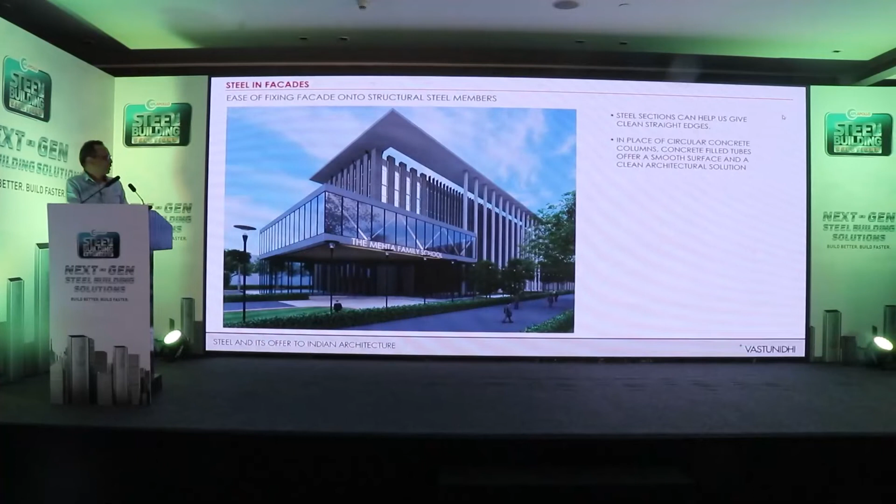Now we are looking at how we can replace, in a lot of places, concrete columns used only for structure. We are doing one project in IT where we are trying to use these steel columns - you can see on the right hand side the steel columns coming in, taking only architectural elements just to support the top frame. The visor edges, all sharp edges, we can easily achieve with steel tubes or steel I-sections. So we're trying to use a combination of methods and materials so the buildings can come out sharp and the way we want to design them.

This is one very interesting project, in Reggio Emilia - an infrastructure project. Seeing is believing with this project, totally done in steel tubes. This is a railway station. I'll show a few more slides - basically how we can use composite materials, lighting, and glass fixing - seeing is believing. This is basically an inspirational slide showing how we can do our infrastructure in a very fast and beautiful way.

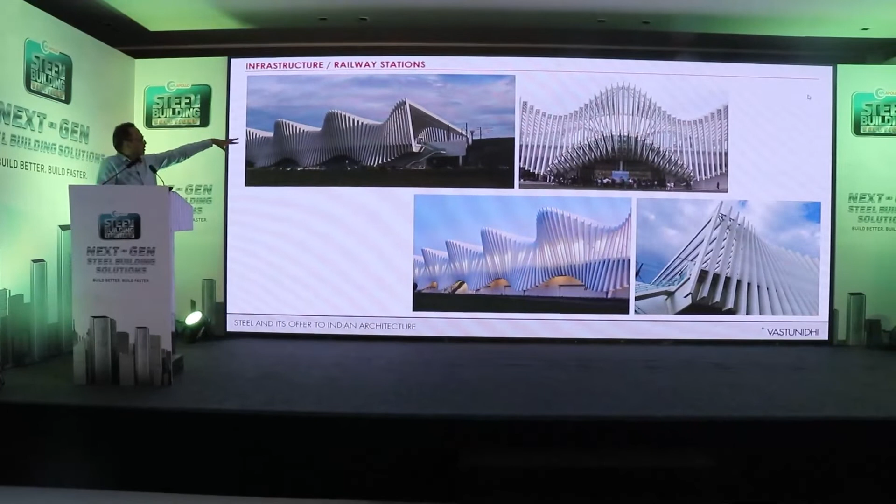This is again the same project which I photographed. You can see the sections, how the steel sections have been used with glass infills. You can see the lighting in this and the bottom row slide, how beautifully the sections have been used and then taking the light and ventilation. So this type of things cannot be created in a single material. We need to understand the material, do the right engineering, and camouflage the right material at the right place to get some iconic infrastructure.

Similarly for landscaping, shaded areas, pathways, and parkings, similar things have been used in steel tubes, split sections, etc., which can be done very fast, and this can even be standardized for a lot of projects. We can give companies like Apollo Tubes etc., they can develop some 5-7 type of products which can be replicated in a lot of areas as standardized, the way we do it in America.

Now coming to a lot of larger spaces which we get, just putting an I-section etc. doesn't help. Looking at circular tubes, straight tubes, etc., we can create a lot of beautiful atriums which add to the interior quality of the project, even the exterior also.

I think that's it from my side.

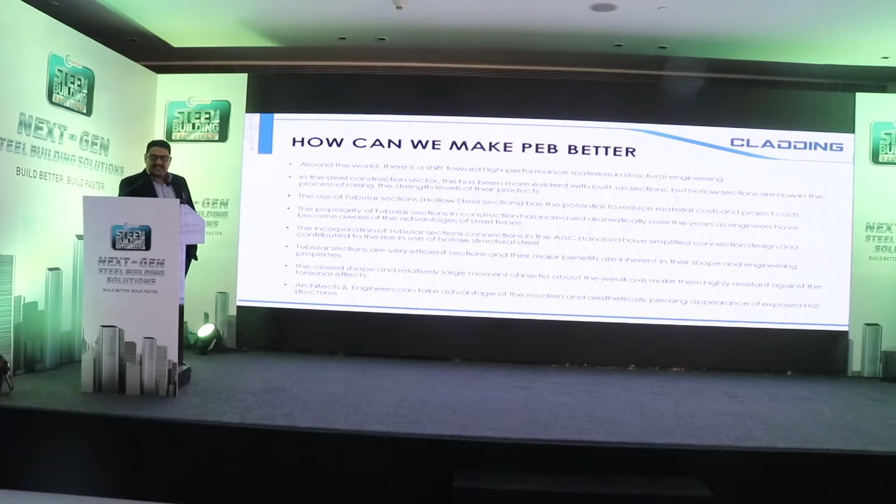Compared to PEB, when we started using this hollow section, we saved a lot of time. When we get a tube of exact size, plus minus only 10mm, cost and time is reduced by approximately 3 months in a single project.

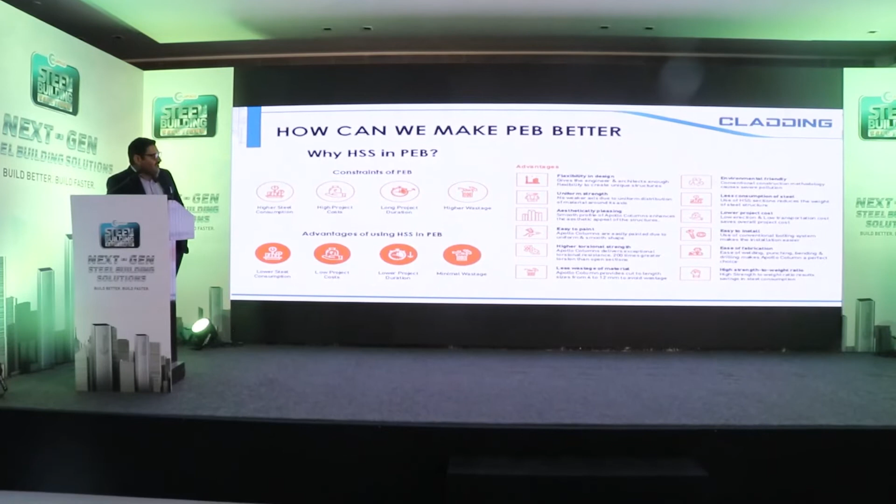As Anubhav says, saving on paint and wastage is minimal - wastage means when we get the tube size exact as we require in the section, so we can achieve a huge saving on scrap. Structural property, as you are aware, hollow section as compared to a built-up section is always, because of its shape, better than a built-up section.

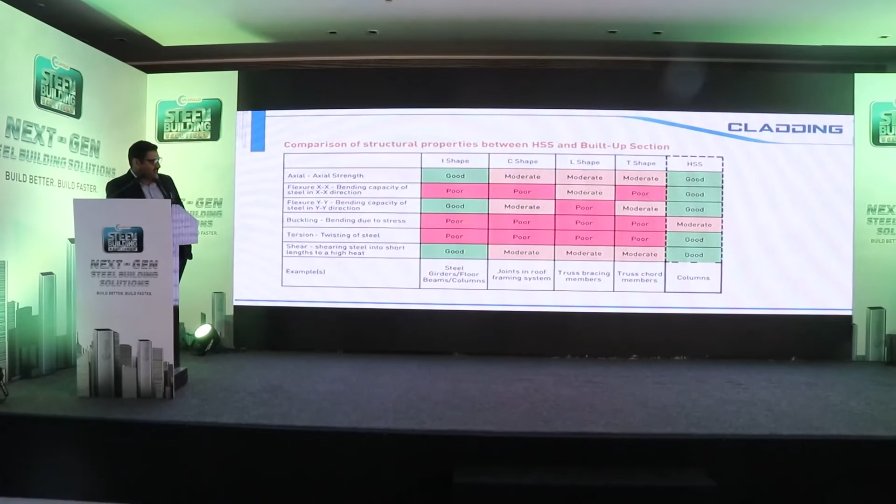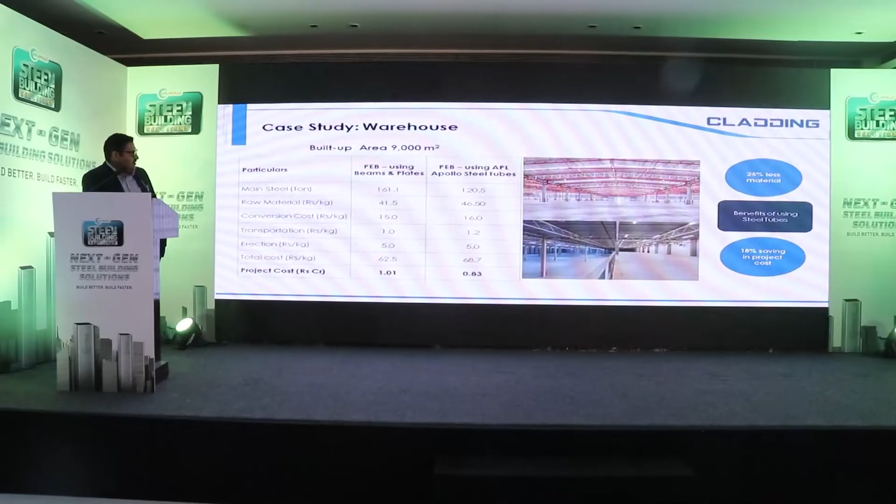This is cost saving, comparison between PEB and hollow tube section. Average cost saving between PEB and hollow section is more than 10% on average.

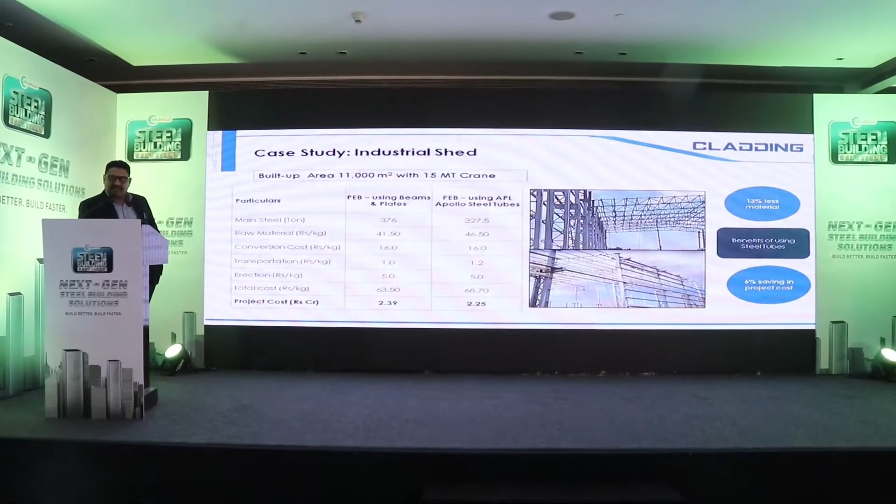And recently, one more project we got in tube section at Kathmandu - it's a DoubleTree by Hilton, a 17-story building in tubular section. As compared to open section, the cost saving of this project is much more than 15%.

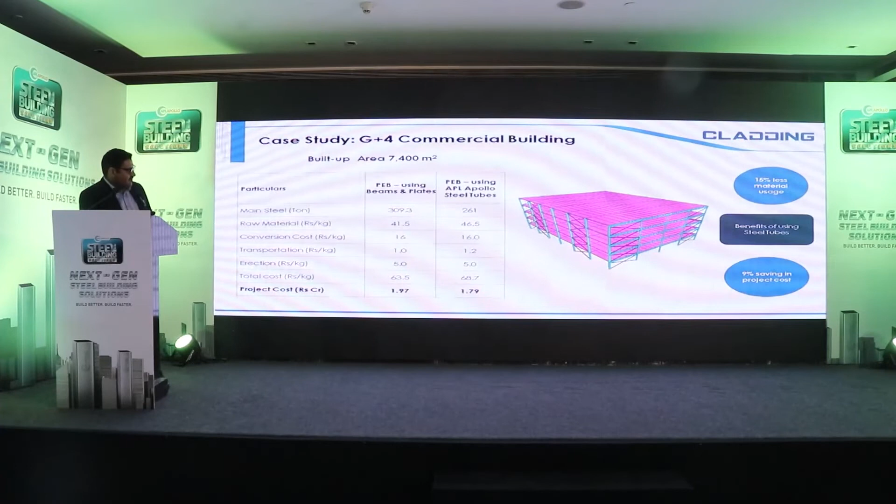Next one. Thank you very much. The fire rating is a challenge, because when we talk of public buildings or high-rise residential towers, we have to address this. The fire paint qualified for 2-hour rating is very costly compared to the European market. If we go for other solutions to increase the fire rating, that is time consuming. So this is the challenge with the steel industry.

Instead of intumescent paint, we can go for vermiculite also. That is cheaper, about 1/3 of the rate. Nowadays it is available with 2 hour, 4 hour fire rating. Moreover, when we do concrete-filled tubes, whatever concrete we fill also does heat sinking, so the fire rating requirement automatically reduces. So instead of maybe 25mm, you may need only 18mm of fire vermiculite. So there is a replacement and an economical solution available nowadays.